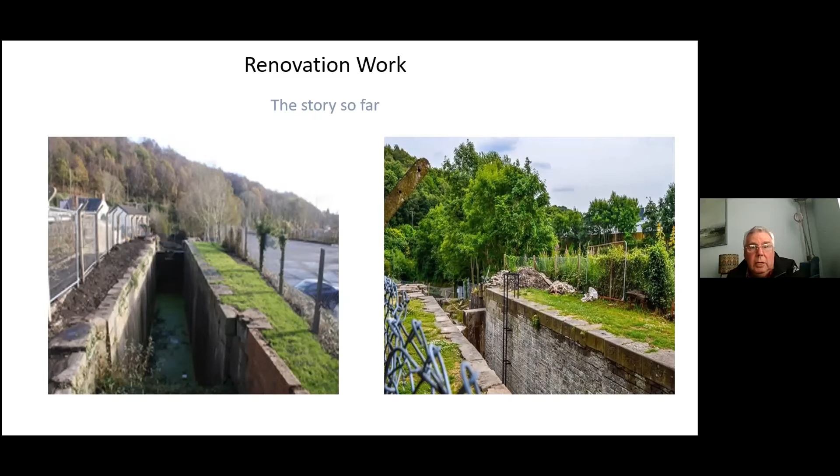If you look at the right hand picture there, what we've done, we've had to remove a lot of the render, and I think you can see just in the center of the lock there, that's one of the concrete dams that Glamorganshire actually installed when they converted them.

This is the work of the plants and the tree root systems getting under the stones. This is actually in the area of the lock gates, and you can see in the center there where the ground paddle would have actually gone down to open the gate to let the water into the lock below. I think you can just make out there as well the top of the concrete dam.

And this is the stonework after we'd been in there and removed all of the root work out of there. As you can appreciate, heavy work, and it was all done by hand. We've got no machinery there at all. It's a labour of love, and I think we've used the techniques used by the Egyptians when they were building the pyramids on that one, so that came in handy.

This is the top of Lock 31, and where you see the red brickwork there and the pits underneath, they were right on the lock gates. Now, when they converted the lock, they created a sluice there, and I think you can see in the center the pipe disappearing off up into beyond. That would have been in the actual channel itself.

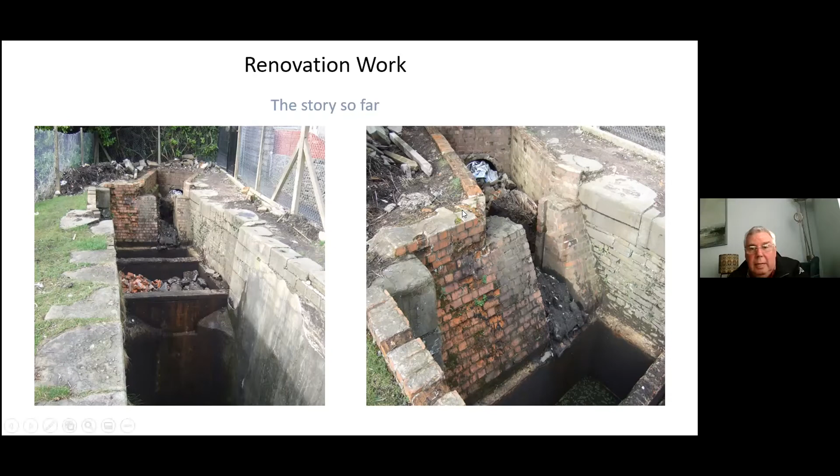And there you can see really the extent of how they blocked up the canal channel and converted it to narrow the water through there. And basically the amount of pipe work that we found within that, it was like a network of pipes. They were going everywhere. So one of the first things that we had to do was really get in there and start to remove this. So this is us in the process of doing that.

Even though it looks small, it was a devil to get out of there. Took ages. It was very, very compact. It'd been there for years and years, and it was like steel. You can see in this photograph, and I think an arrow is going to come up now.

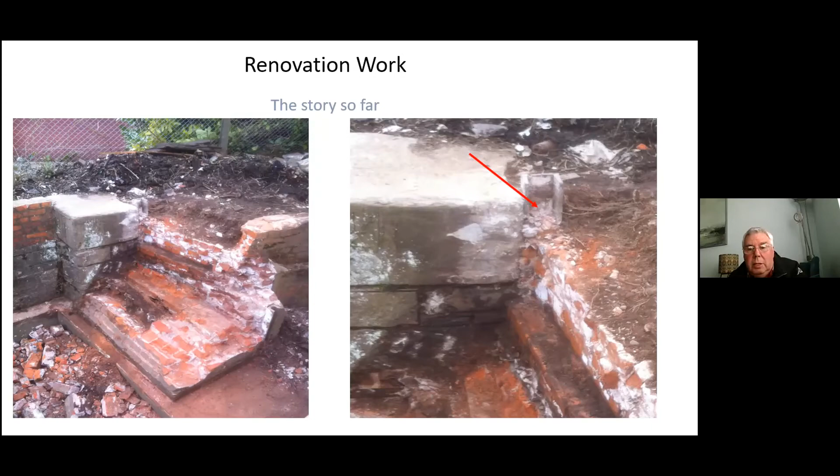Right, now that there is part of the original canal structure. It was part of what formed what they call a stop dam. Now, a stop dam was used when they had to repair a lock gate. So it was a means of stopping the flow of water behind that, so that they could get in and do any repair work necessary on the gate itself. So that really was still in situ when we decided to take all the brickwork away.

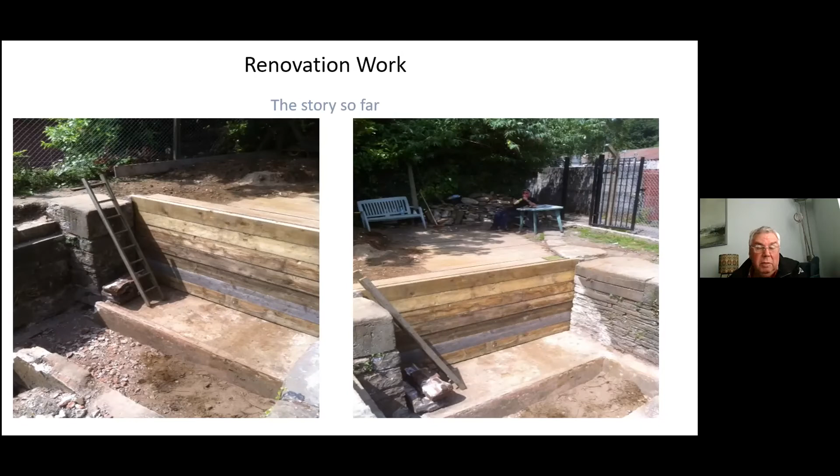And this is what we ended up with. The wood there would have been exactly the same as a stop dam. So you can see in effect really what the dam would have done. Cleared it out, and the settling pits are still there. What they did with those settling pits is they've actually gone through the original canal floor. They've dug down deeper than the original floor surface itself, so they damaged that, and we can't actually repair that at the moment. So we've just left it for the time being, see what we can do there.

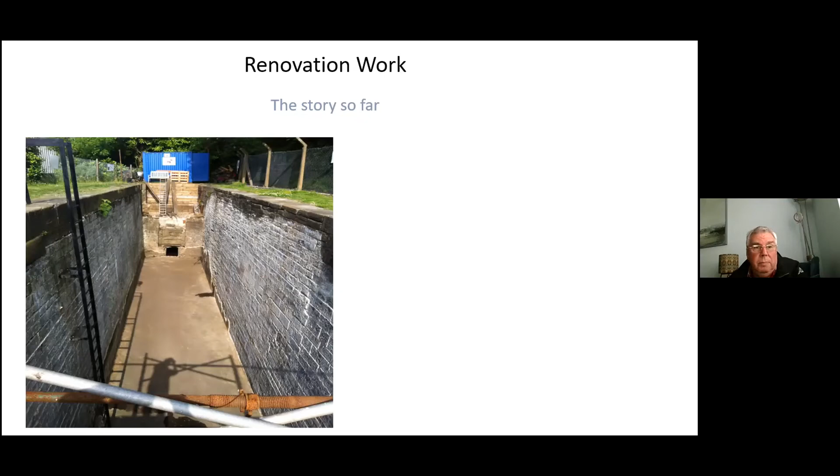This is a look up Lock 31, and again, as I mentioned before, with the render that was put onto the lock, the stonework was completely covered up, and we've had to uncover all that, take it all off, and the actual craftsmanship and the stonework in these locks is unbelievable. You have to see it close up to really appreciate the skill of those people that are obviously working with hand tools.

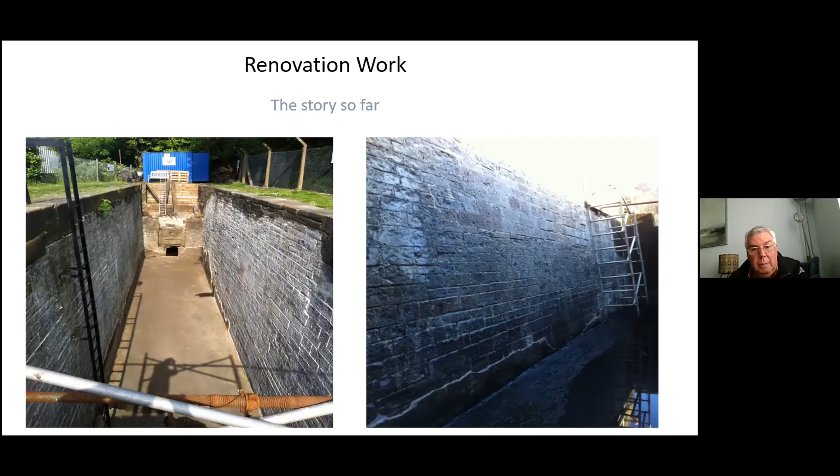Again, looking inside there, that's inside the lock. Gives you an idea, really. You can still see some of the render at the bottom. Now, the bottom of the lock itself, that has been covered in concrete, but we've left that in there. It doesn't make any sense to pull that up at the moment. Trying to expose that could damage the floor of the lock. So at the minute, we've just left it.

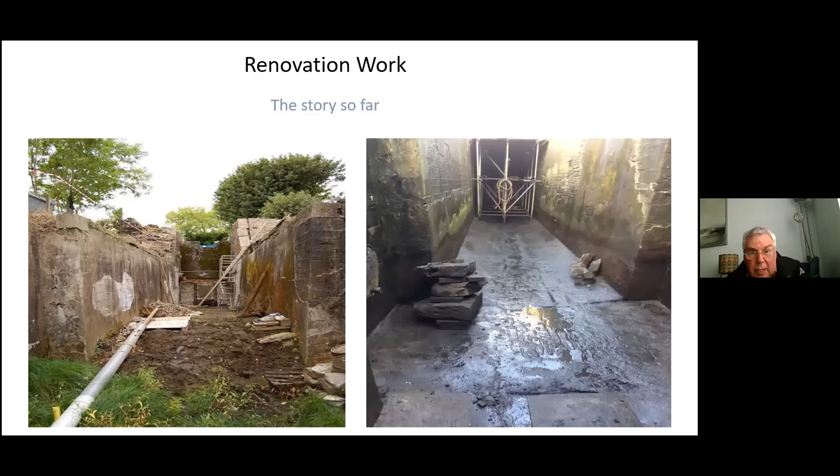This is looking up lock 32 from the tail bridge end, and if you can look up on top of the lock, you will see that there's no staircase on the left-hand side. That was completely demolished. Nothing left there at all, and you can just about make out on the other side the copings starting to fall in. Right, this is the lock empty, and as I said, there are some of the larger of the stones that have ended up at the bottom of the lock.

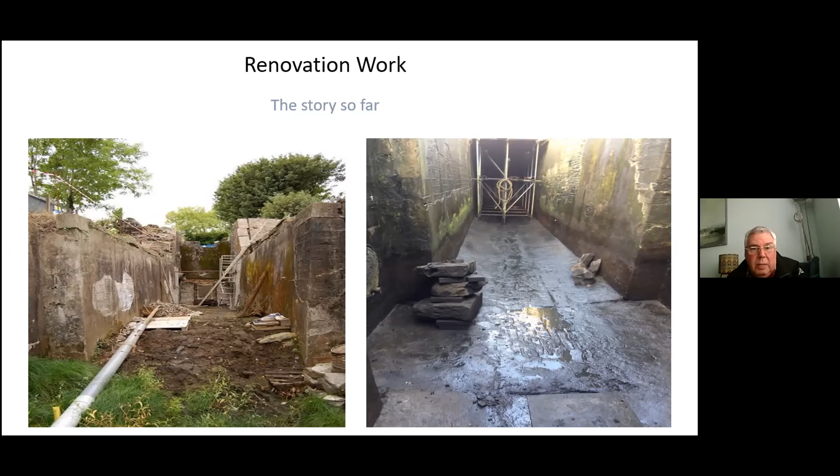And if you can just look at the second picture, just to the left of those, where those stones are, can you see what looks like a pipe? Well, that's what it is, because that was a stone pipe that Brown Lenox put through the wall of the lock, and that formed part of their system of pipework that they actually used when they were operating the canal locks as water tanks.

Again, this is the pipework that they installed. They obviously went in through the walls of the original stonework there, put the pipes in, and that was then just covered back by red brick. So they just bricked it up, and that's the result of us taking the pipework out and then restoring that. That's all been pointed now.

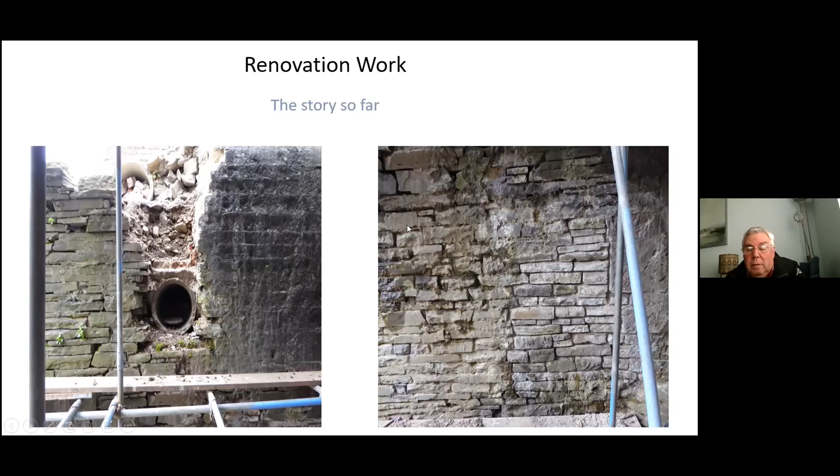We use hydraulic lime for the pointing work on it, as it would have been done in the 1790s. In fact, we went up to Tŷ-Mawr works up in Brecon. They do a lot of traditional work up there. In fact, they worked on the Lido in Pontypridd, and we had the mortar analysed, and they gave us a recipe then for us to make up the mortar as it would have been used originally for the work.

This is in Lock 32, and that's part of the original flooring within the lock system that we uncovered. We took up the concrete from that because obviously we could see part of where the shovel is there. Just to the left of that, that's where the wooden sill would have been for the lock gates. And if it looks as if it's going into an arrow, well, it did, because there were two gates there, and they would have formed into a V shape when they were closed.

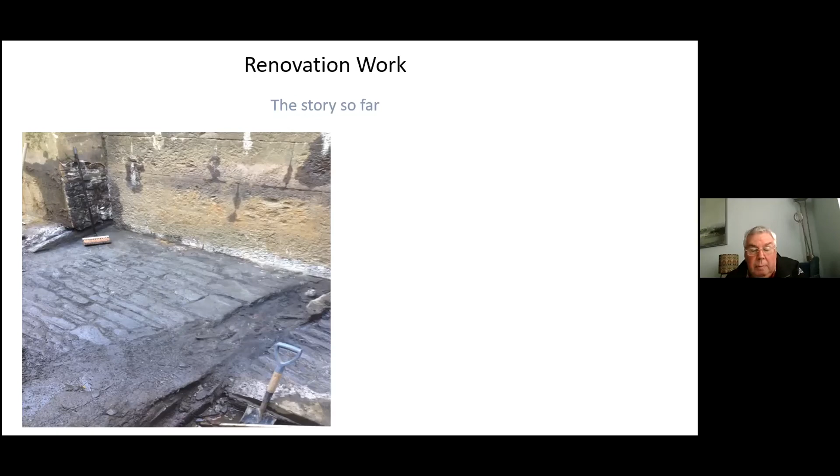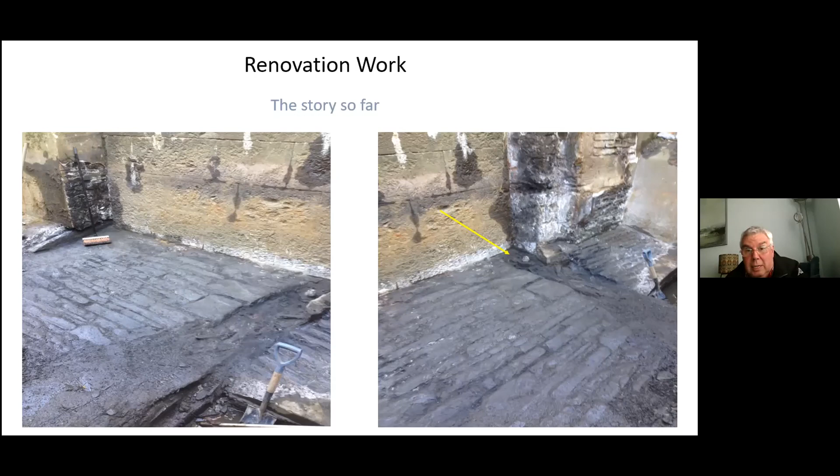And in the corner there, we uncovered the pivot point for the bottom of the lock gate. So the gate would have actually come down that wall. The bottom of the gate would have rested on that, and then it would have balanced at the top with a hoop that would have been secured, and basically the pivot, or the counter arm, would have just rotated the whole gate on that point there.

As I mentioned earlier, the one staircase that was left, well, partially left for us, was the east staircase, and a lot of the bigger coping stones were very dangerously loose and hanging off, just about to fall in. So what we had to do was get in there, take them all away, and reinstate a lot of the stonework underneath to secure it, then start to replace them and put them back in.

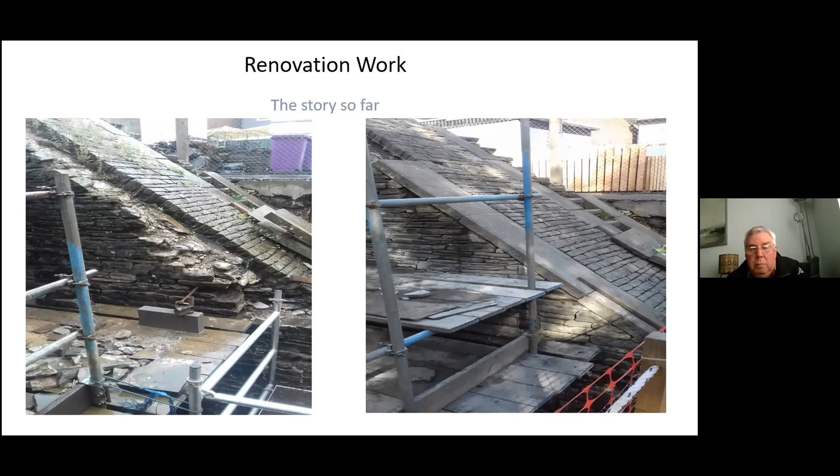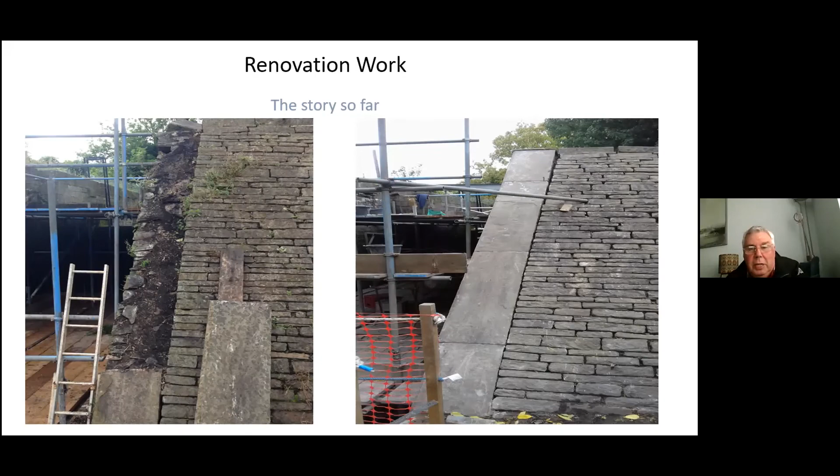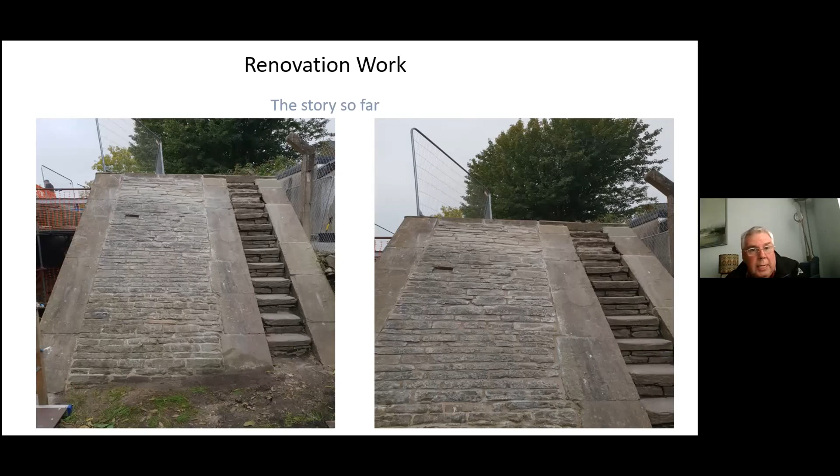On this side we were lucky that the majority of the copings were still on site, but as you see with the other one, we didn't have anything at all. You can see it was pretty loose on that side, and that's after we finished putting it back in. We've had to lift all of this in by hand - whether they would have done that in the original days, I don't know, but there we go, that's it finished. That's the east staircase, all done, all pointed up, all looking nice, but it didn't look like that when we started.

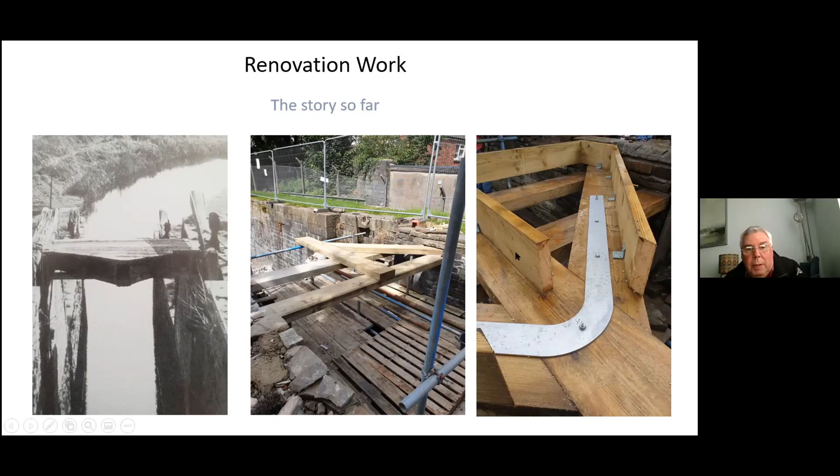In between the locks, a lot of the boatmen really went across bridges like this. Now in Pontypridd we didn't have any bridges left, they were long gone. But the picture you see on the left there, that's from Taff's Well, and it was a similar design to the one we had in Pontypridd. What we had to do, because we were lucky enough to have the footprint of the timbers left in the mortar, we basically reverse engineered the bridges. So we started off with a picture of an old bridge, what it would look like, a footprint of the timbers where we could get in there and replace them.

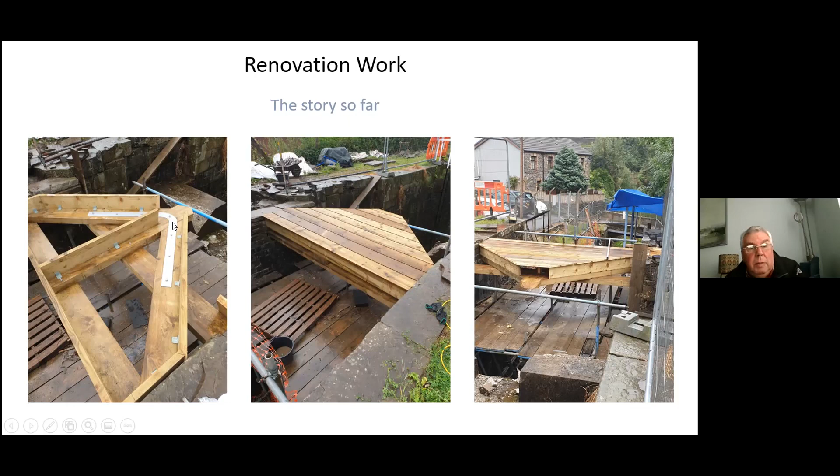And then we started to put it together piece by piece till we ended up with a bridge, and that's our efforts there - that's the new bridge in. A lot of this metalwork, as I mentioned earlier, there were smiths on site, so all the ironwork required for the gates or for reinforcing the bridges would have all been made on site. But we had to obviously get that made and put in.

That's the other staircase, believe it or not, or at least that's where it should be. Again, what you can see there are the remnants of the works that Brown Lenox put in. Once we had taken a lot of that away, we had to start to reform what would have been the west staircase. So we built basically a bunker, and that would serve as a retaining structure for the rebuilding. We started off with that - again, you can see us at work there, starting taking it away, starting to rebuild from the bottom up.

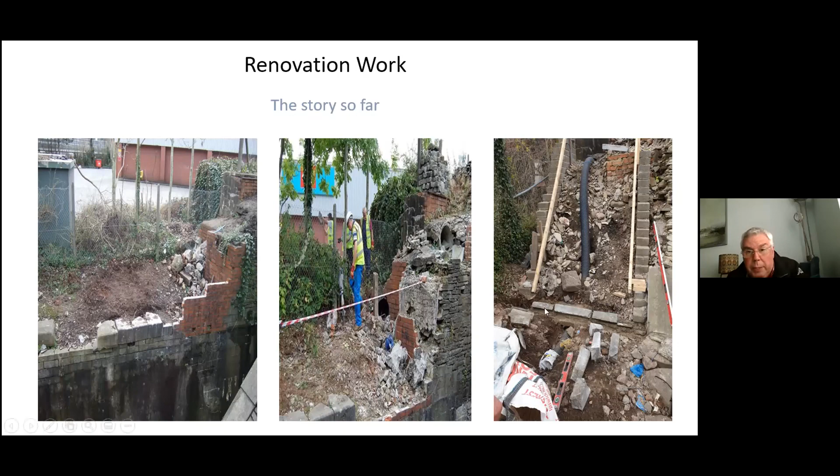The pipe, you may be wondering what that's for. Well, we've put that in there as a conduit, because the plan is to get water to go back up into the top lock and use the locks themselves as a full-scale model of how the system would have worked. So if we needed to pump water back up, we're not going to take the stairs back down again - we can pump it back through those pipes. So we put that in just as a precursor for doing that.

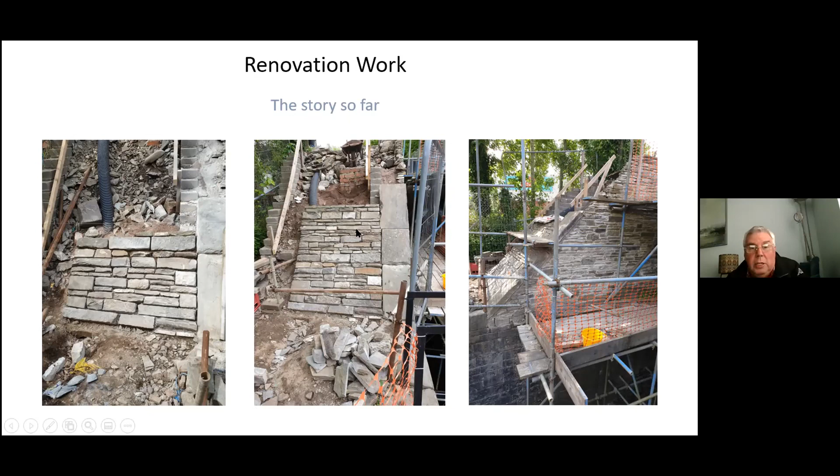And we're in the process now, at the moment, near the small tail bridge, of reconstructing the stonework there so we can put the second bridge in. So that's work we were doing this very morning.

Hopefully you've enjoyed that - it's a bit of a quick race through, but as a historical monument for the industrial past of Pontypridd, it would have been a shame to let it go to rack and ruin. So when we're finished, and I don't think it'll be finished anytime too soon, but when we are finished, hopefully it will be a legacy for Pontypridd. Thank you.